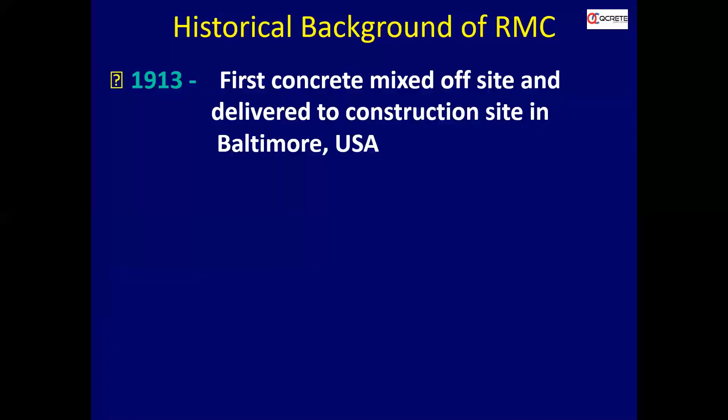Okay, so a brief historical background of RMC. 1913, the first concrete mixed off-site and delivered to a construction site in Baltimore, USA. And as I told you, 1903 was the first, the concrete plant was patented in Germany. And in 1926, transit mixer was first used. 1930, the first RMC plant established in UK. And 1933, the first specification of RMC published in USA.

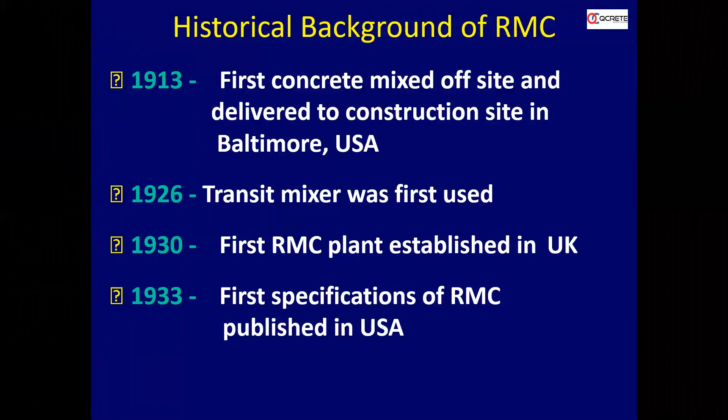Now, the historic background of RMC: from 1960 to 1980, there was a phenomenal growth of RMC in USA. Around 31 million cubic meters were built by 1974, and by 1990, 75% of cement consumption was manufactured through ready-mix concrete plants. Now we can say around 90% of concrete produced is from ready-mix plants.

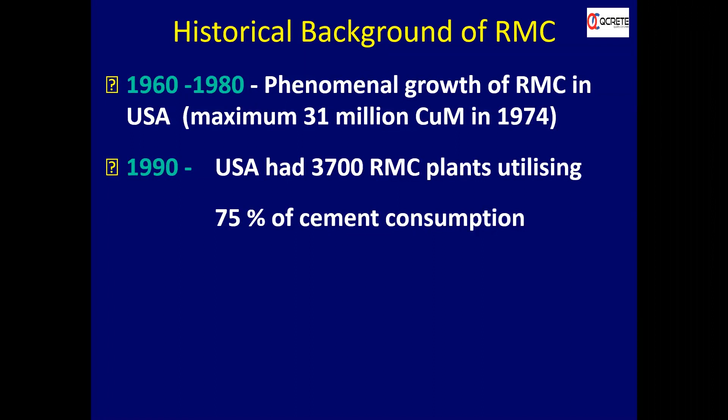So compared to that, now if we see RMC in India: 1991, the first commercial RMC plant was set up in Pune, but closed later on. That was not viable because a lot of taxes were being imposed on ready-mix concrete plants or concrete coming out of the plant, so it was not viable for commercial operations. It was closed later on, and then in 1994 it started again.

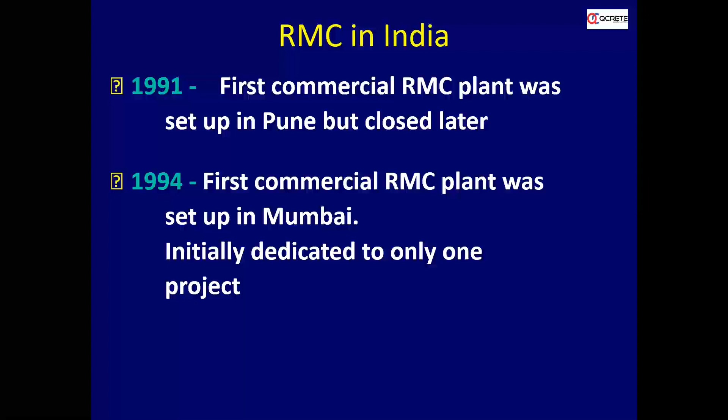It started as a dedicated plant, and then they started using it as a commercial plant. So in 1994 we started our commercial operations in Mumbai. That is the start of RMC in India. Now you can see a ready-mix concrete plant as of today.

2020, or you can say now 2021 also, it's in infant stage. Market penetration is around 15%. So we are still in the toddling stage actually. We require a lot of ready-mix operators, a lot of support from the construction industry to reach the stage of developed countries like USA, UK, and other developed countries.

Now, this is basically a ready-mix concrete plant. You can see it comes in different capacities depending on the requirement. Mostly for smaller setups, it starts with 30 cubic meter batching per hour. It goes up to 60, then we have 120, then we have 180 cubic meter.

So depending on the requirement, suppose a huge project is there, then they go for a dedicated plant where they can use 30 cubic meter, 60 cubic meter, 120 cubic meter, 180 cubic meter capacity also, they are using it.

So all the cements are being stored in silos, and we have transit mixers taking the concrete, plying the cities, carrying the concrete. So working in the ready-mix industry, it's a live industry.

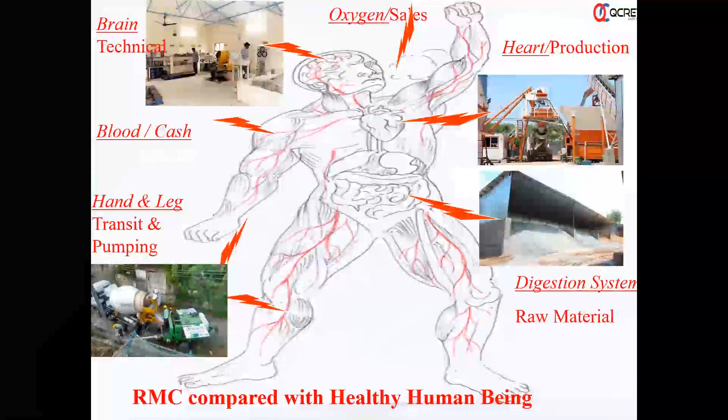So just as I told you, the first part - the sales and the cash flow - I'm not going to discuss, it's a technical support system. For any ready mix concrete, we have to have a good laboratory at the plant.

It is also essential that all the consumers should visit the ready mix plant and see for themselves what sort of facilities a ready mix operator has, and what quality systems they are following, or whether they have immediate access to well-equipped laboratories fully equipped to carry out tests on concrete, cement, aggregates, and sand. All tests are to be carried out as per the relevant IS codes.

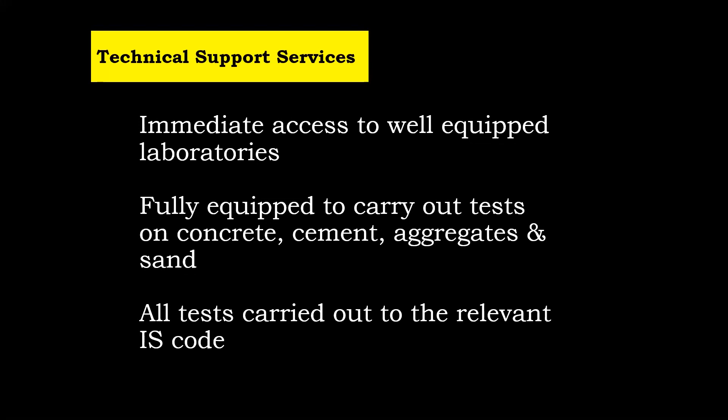So this is a view of a laboratory. Every person who orders concrete, even if it is an individual house builder, can visit the plant and see for himself what all facilities and things they are doing at the lab to produce good concrete.

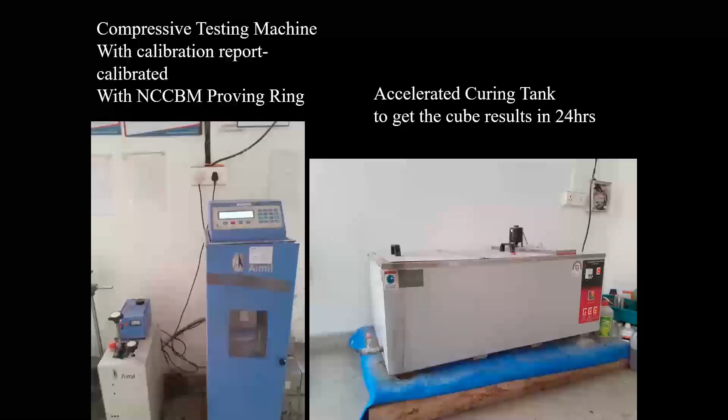Now you can see we have equipment like a compressive testing machine. Most engineers fail to ask when this machine was calibrated, or where the calibration report is. The operator has to display the calibration report near the machine itself, so that the customer who comes to check the cube strength can see when it has been calibrated. It is calibrated through NCCBM, which gives us a certificate that has to be pasted along with it. Also, some customers say they want to test it themselves.

We take it to some lab where it has to be tested. But there also they should ask the same question: when was your machine last calibrated? Because all machines have to be calibrated, and only then do you get the correct report.

We have this accelerated curing tank to get cube results in 24 hours. Basically, somebody wants to do the concrete and cannot wait for 28 days. We cast the cubes and get the results in 24 hours, so we can go ahead with the concrete pour without waiting to see whether the mix design done is correct or not.

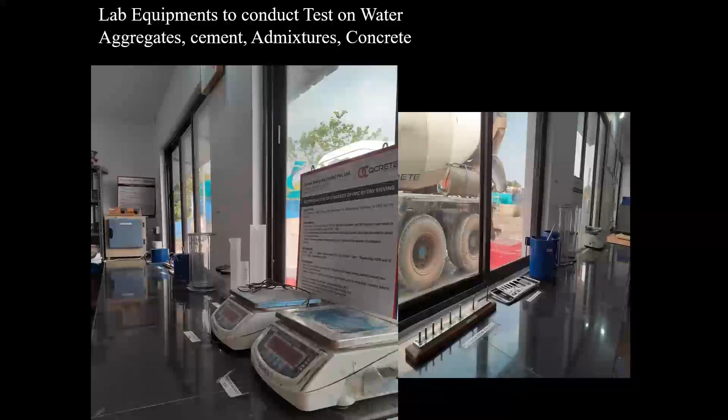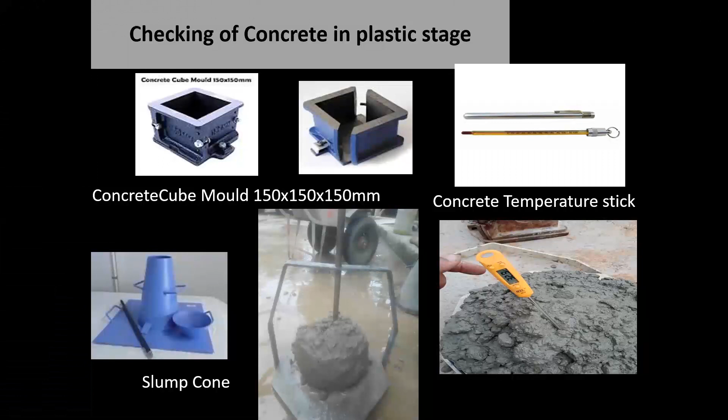Now I'll clear a few doubts. For sampling in a ready-mix industry, we take the sample for making slump as well as for cubes. There's a slight difference when we are doing site concrete versus ready-mix concrete. When a truck comes with 6 cubic meters of concrete, the sampling method, as per BS or IS second revision, says that the first 0.3 cubic meter you have to let go into the pump, and then the balance you have to take in.

This is a scoop which is being used, and the concrete flow is like this. You have to take the scoop across the flow actually, and it is taken in one part, then let concrete go, then second part, then third part, and fourth part, and then it has to be taken into a pan, remixed, and then taken in. So that way sampling has to be done.

If you take it from the beginning, you may get segregated concrete because it's a huge sample, 6 cubic meters, and from that sample you have to take one sample of 3 cubes. Sometimes the customer says, no, take 1 cube from every truck. That's not the right method, because you may not get the right strength. If one sample means you have to take at least 3 cubes from one transit mixer.

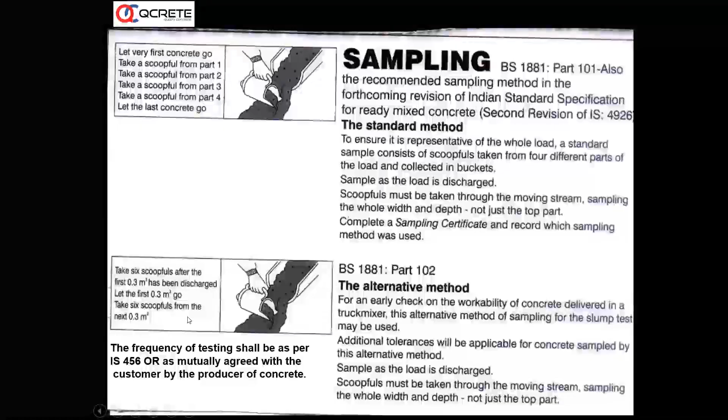This is an alternative method. Some discharge has to be taken - the discharge takes 6 scoopfuls after 0.3 cubic meter discharge. Let the first 0.3 cubic meter go, then take 6 scoopfuls from the next 0.3 cubic meters. Now you can see here how this particular person is taking it through this scoop, and the concrete is flowing in this direction. Through the scoop, he is taking the sample across the flow of the concrete.

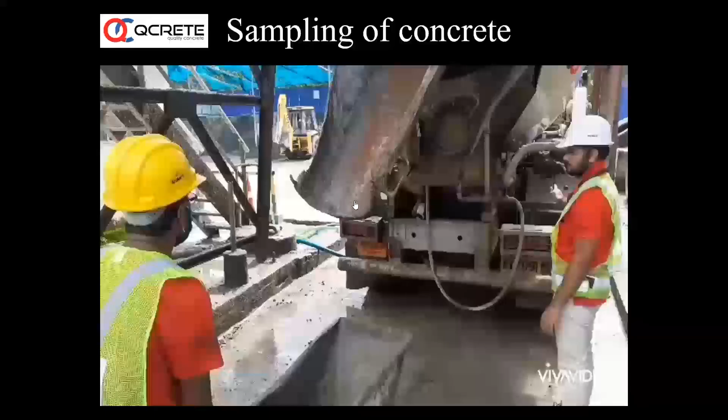Now you can just see a small video. The sample is being taken at the plant. Now you can check the temperature of the concrete through the temperature gauge. Now the sample is being remixed.

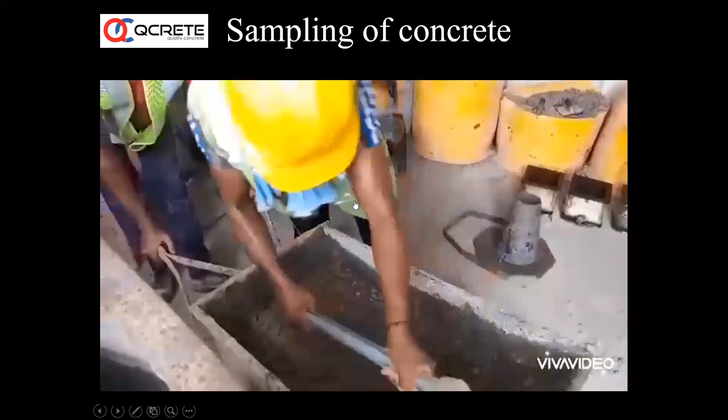This remixing is very, very important. It has to be remixed. The sample has to be remixed before we take the slump or the concrete cube section, because from the truck, there's a chance that the first concrete which is coming is segregated. This is a scoop which they are using to take it to form the slump.

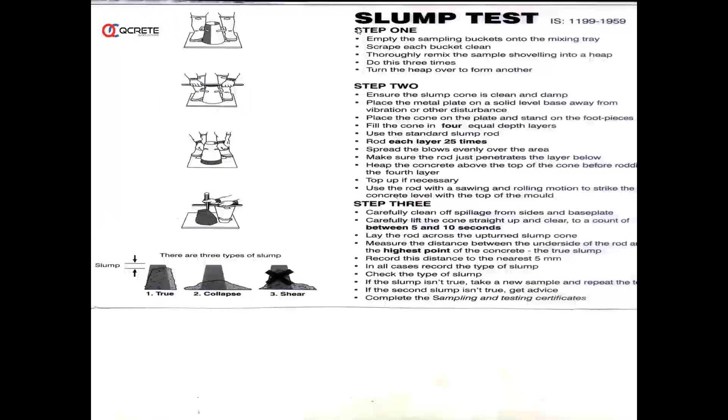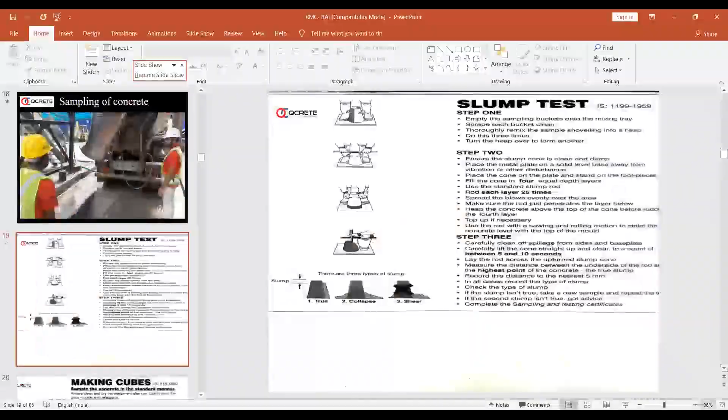Okay, I'm skipping the video. I was just showing how to take the sample through a video.

Are you able to hear it? Hello? Yes, yes, I'm able to hear you. Am I audible? Yes, yes, perfect.

So I was just showing the video of how to sample concrete at the plant and how it has to be remixed, and then how the slump test is being done at the plant, and then how cubes are filled, the correct way of filling the cubes. Anyway, the video is not visible, so I'll show it after the session is over.

I'll drop this PPT and then show that video actually.

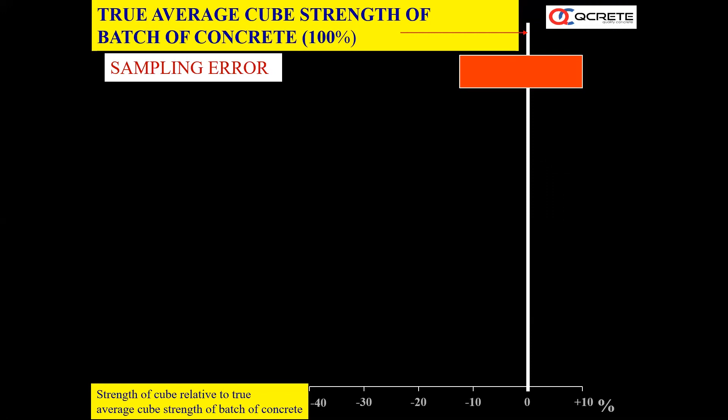So for a particular batch of concrete, when you are taking slump and concrete cubes, due to sampling error, there is a chance that your cube may not achieve the strength. It may show overstrength by 10% or minus 10%. If correct sampling is not done, the cube strength can vary from minus 10% to plus 10%, or failure to remix the sample properly. As I told you, when you take the concrete sample, it has to be remixed properly. If this is not done, there is a chance that around 15% failure of concrete can take place.

Then we have distorted cube molds and lack of cube mold oil. If this is not done properly, there is a chance that you may not achieve the cube strength by minus 20%, or you may achieve it more by around 5%.

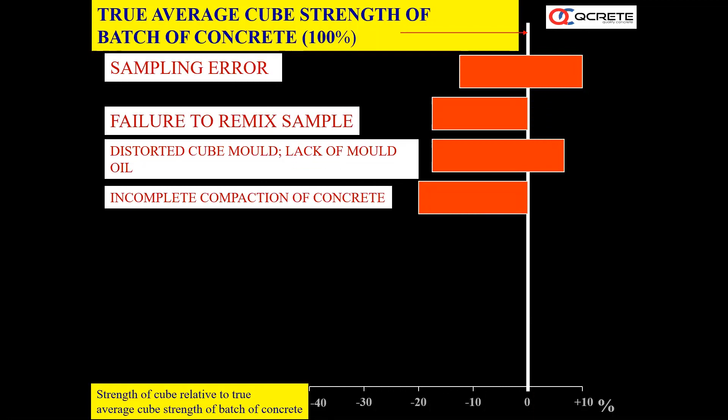Incomplete compaction of concrete can lead to 20% less strength, or curing temperature outside the permitted range as shown in code can lead to plus or minus 10%. If it is very hot summer, it may show higher strength. If it is during cold, foggy nights, it can show minus strength results.

Lack of continuous moist curing can lead to minus 35% less strength. Faulty cube locations in the machine or other operator faults can lead to minus 20% or plus 5%. And faulty test machines, if present, can lead to minus 25% to plus 10%. So these are the variations.

Most of the time, when a cube fails, people directly say that the concrete is not good, and due to this the concrete has failed. Directly the blame is put on the ready mix producer. But it's not like that. As an engineer, we have to analyze all these parameters to understand why the cube has actually failed.

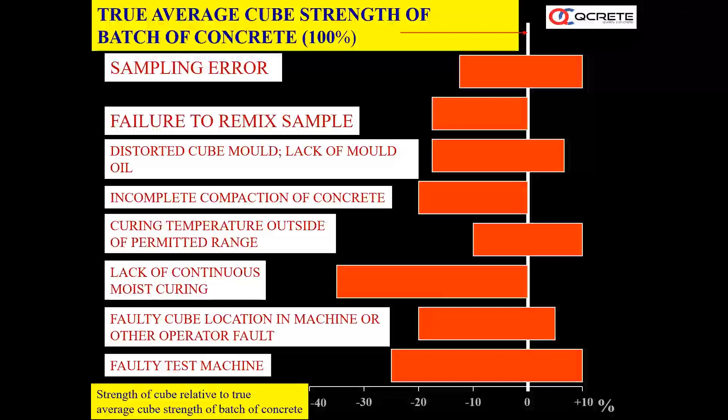Now in ready mix plants, it is not labor oriented anymore. Earlier we used to get cement in bags even in ready mix plants. When we started our operation in Kerala, around 2007 or 2008, we used to get bags, and it was a manual operation, cutting the bag and putting it into a loader. Now that time has gone, we get bulkers which come in airtight containers, reach the plant, and are directly unloaded into the silos.

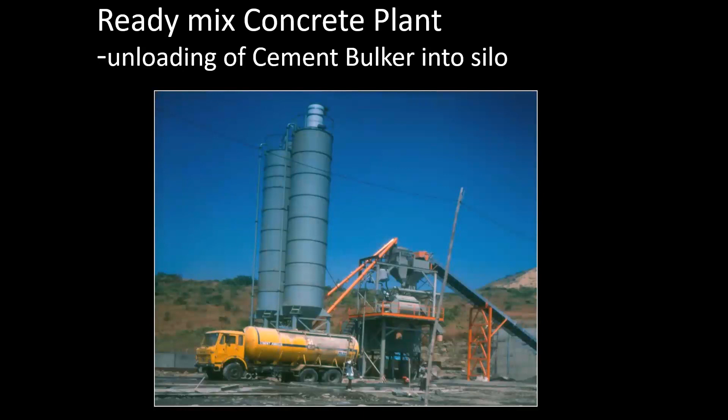Now in ready mix, all the raw materials are received through weight. We have a weighbridge there. Once the truck comes, the quality person goes to the top of it, collects samples, and it is tested in the laboratory for initial testing, to check whether the aggregate supplier or crusher has supplied the same quality material or if there is a variation. Some quick tests are done to pass that material into the yard.

Now if you visit ready mix plants, you can see all the materials are stored in separate bins. There is a hard base where no mixing of material with mud takes place. A concrete hard base is kept so that the materials are kept clean and differentiated, like 20mm, 12mm sand, M sand, and everything else.

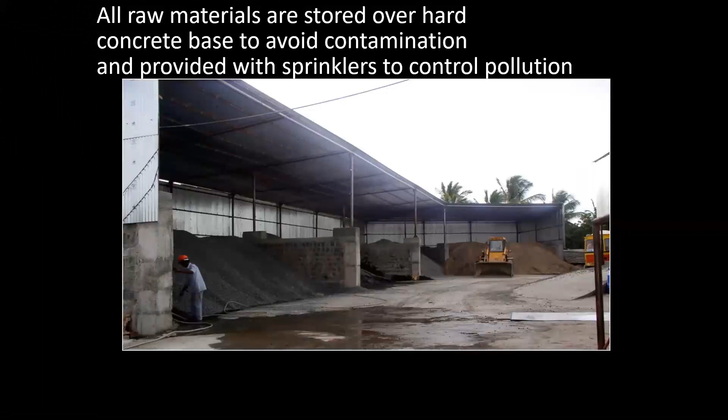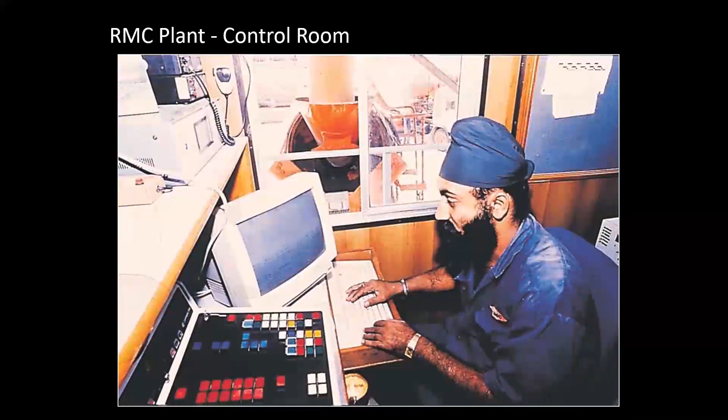Now this is microprocessor controlled. This person is just taking instructions from the technical department. The technical department designs the entire mixes and passes them on, and it is stored into this computer's memory. Depending on that, it can be repeated also, because the customer name, the batch reports, and the mix designs are all stored. So you just have to click the buttons and the mixing starts, and the concrete production begins.

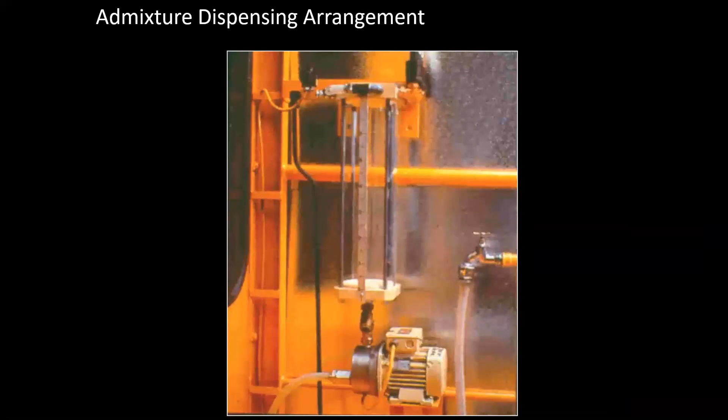Now it is all an electromechanical weighing system. All raw materials which come into the plant are weighed, and all material that goes into mixing, whether 1 cubic meter, 2 cubic meters, or half a cubic meter, everything is weighed. All raw materials - aggregate, cement, water, and admixture - are measured by weight only. It goes into the mixing unit of the plant. These are called admixture dispensing units. Most ready mix plants will have 2 admixture dispensing units.

One dispensing unit is kept for normal concrete, and another is kept for specialized concrete, which might be high strength concrete or might be to produce SCC. So 2 dispensing units will be there in a ready mix plant.

So this one explains why we should use ready mix concrete. I'll come to that next part. Earlier I gave a brief about what quality aspects are being checked at the ready mix plant.

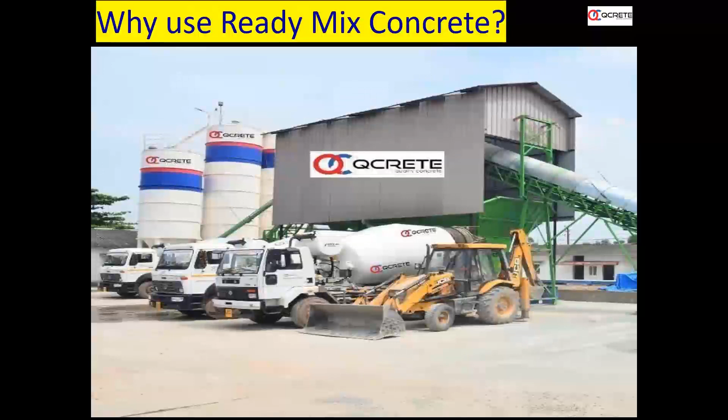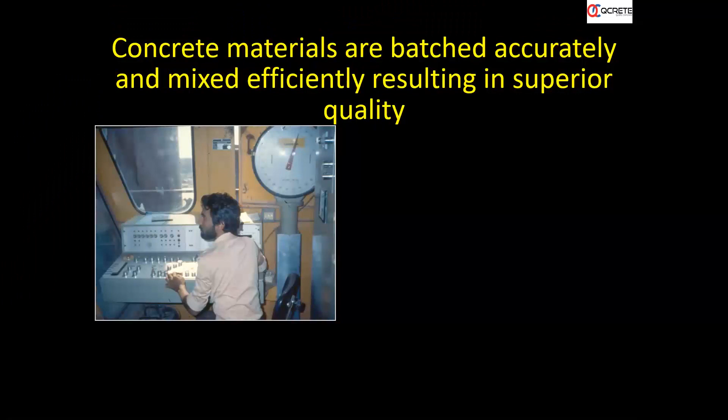Now, why use ready mix concrete? If you compare it with site mix, concrete materials are batched accurately and mixed efficiently, resulting in superior quality. Compared with site mix, we have the drum mixer where the efficiency of mixing is very poor. Now you can see pan mixers, with arms rotating at very high speed, and due to which we get superior quality concrete mix. Also, since it is batched by weight, it results in faster speed of production.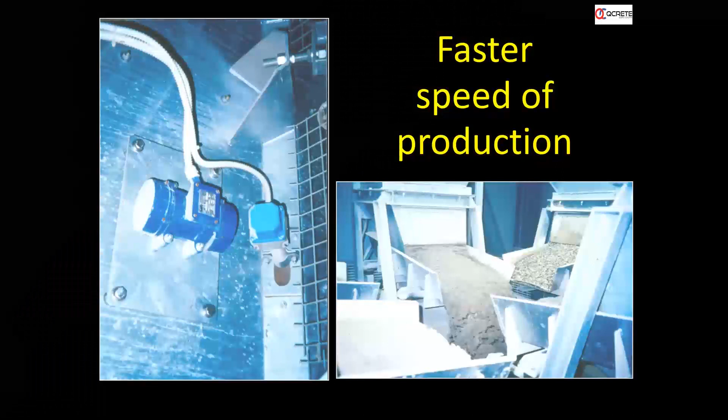Then, moisture corrections can be done accurately, hence water cement ratio can be accurately controlled. In some systems, as the aggregate flows into the batching system, whatever moisture is there in that aggregate gets measured, and that much water gets reduced from the total water to be added to the concrete mix, so your water cement ratio is accurately controlled.

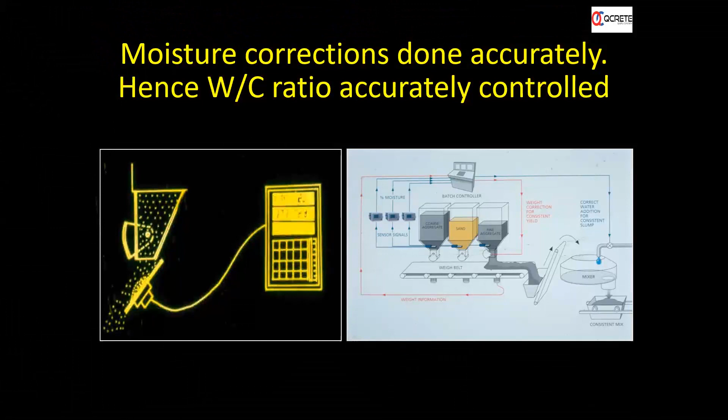At construction sites, housekeeping improves because you don't have to worry about storing aggregate, cement, and all these things. You only have to worry about scaffolding and how to place the concrete, where the equipment should be placed to deliver it. Other than that, all other space can be used for storing shuttering, steel, etc. at site.

Now, labor requirements can be reduced considerably. When using ready mix with pump concrete, we have 4 to 5 people standing on the slab handling the line pump. But if it is a boom pump, we have only 2 persons standing on the slab, so there is minimum manpower required. A lot of labor requirement can be reduced, actually.

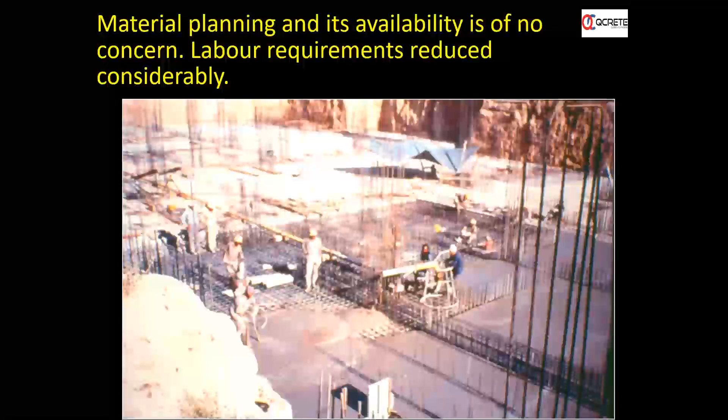Also, chemical admixtures are accurately and properly dispersed in the concrete mix. Chemical and mineral admixtures can be used easily. If you are using site mix concrete, you may not be able to use mineral admixtures like fly ash, GGBS, or microsilica for producing high strength concrete—these are all very difficult to use in site mix concrete. Even chemicals are difficult to use at site mix to an extent. So these can all be used when we are using ready mix concrete.

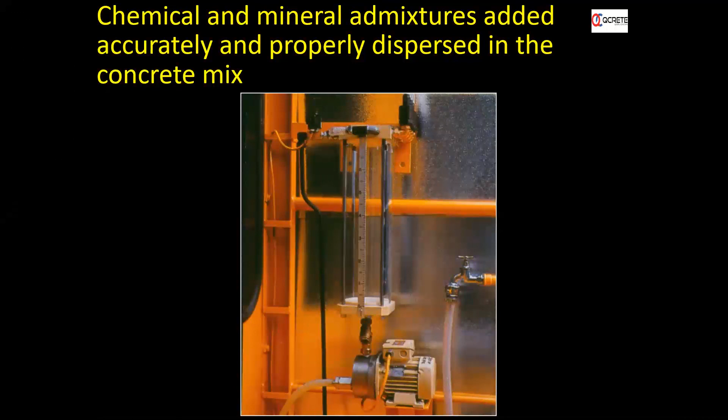It creates less environmental pollution at the site. For site mix, if you dump all the aggregate and cement, pollution happens at the site. Whereas in a ready mix plant, it is already located in an industrial zone where a certain level of pollution is allowed. So all the pollution happens at the industrial area, whereas at the site it is clean, because only the mixed concrete reaches the site, so it doesn't create any pollution at the site.

It also creates less nuisance on site, as stacking of materials is avoided. There is no stacking of materials, so it is much less nuisance at site.

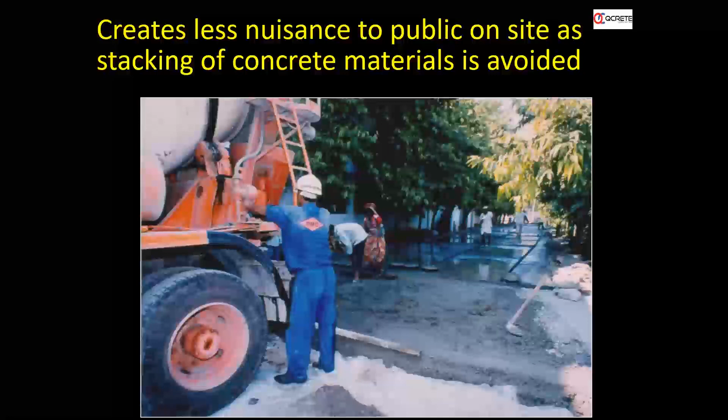It helps for pump concrete, bulk transportation, self-compacting concrete, faster concrete—all these things help. When we started our ready mix operation in Cochin city, most people were using bamboo and balli for the supporting scaffolding system. Now if you go around Cochin city, you can see a considerable improvement in formwork. It automatically improves with time, because if they wanted to receive ready-mix concrete, they couldn't continue with their old practices of bamboo and balli. So scaffolding automatically improves by the use of ready-mix.

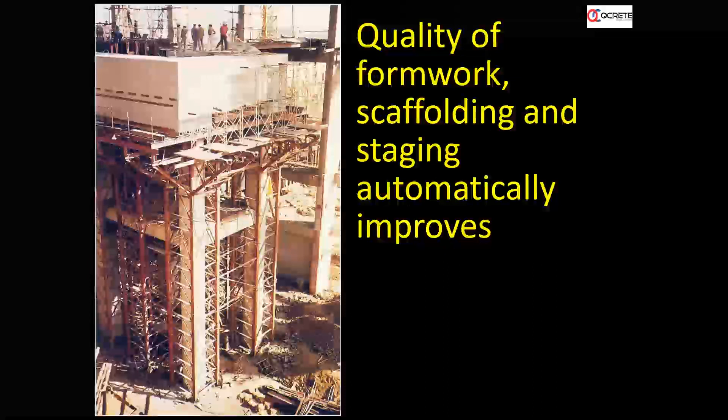Another important property is that for the pump being used in concrete pumping, the concrete should be workable and cohesive—that's essential for the pump to work. This is good for both the concrete and the site person, because the pump requires workable and cohesive concrete. So the mix design improves to suit the pumpable requirement, and ready-mix operators are forced to give a good, workable and pumpable concrete, which automatically improves the finish and durability of the concrete structures.

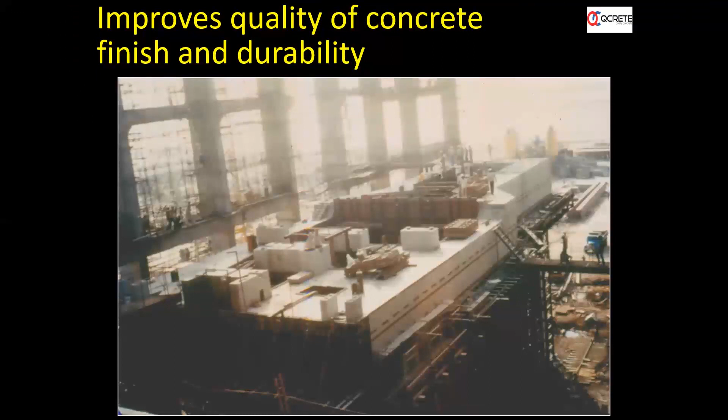Now again, why use RMC actually? Wastage of concrete materials can be avoided. At site mix concrete, a lot of materials are procured by the contractors, and at the end of the concrete day, you can see concrete materials lying wasted at the site. Temperature control of concrete, as I told you earlier, is easier in both hot and cold weather conditions. It also facilitates new materials like fibers, microsilica, etc.

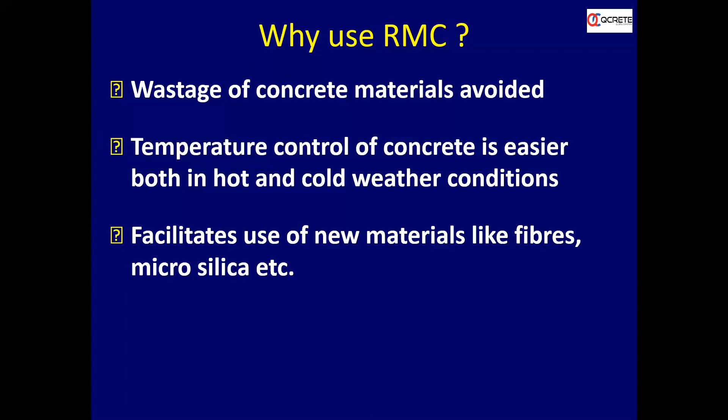Most of the time what happens is that we simply order the concrete. Most of the time, what I have seen is that engineers will say, okay, I want M25 concrete or I want M20 concrete. Nothing more than that they will specify.

The most important thing is the type of structure which you are handling at site. If it is normal reinforcement, you can go in for normal workability. If heavy reinforcement is there, your workability requirement increases. So these are all requirements which the engineer should pass on to the ready-mix operator.

Because if you just ask for a concrete, then what happens is they will give you 100 mm slump at site, plus minus 25, as per the requirement of IS code. It is allowed, that is 75 to 125, and you cannot reject the concrete.

So if it comes at 75, you are required to take the concrete, but when it reaches the slab, the workers struggle to put the concrete in place, and then competition starts if the steel reinforcement is congested. So as site engineers, you should look into the site requirement.

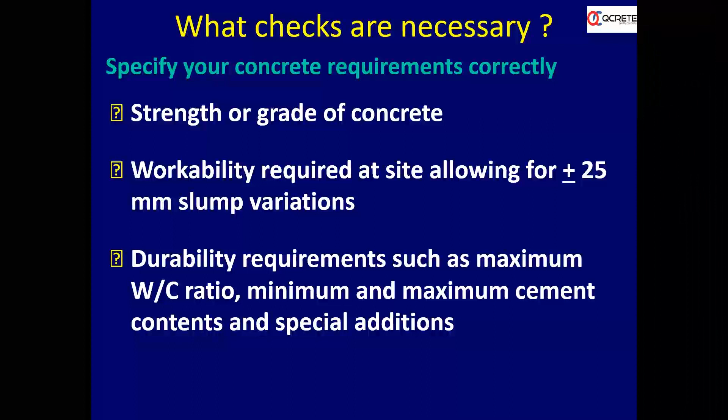Then durability requirement, like what is the maximum water-cement ratio, minimum and maximum cement content, special additions - all these things must be very correctly specified. These are the things which have to be done by the site engineers.

Then again, what is happening is the rate of gain of strength to suit the formwork removal. Some people will take the concrete - it may be required for column concrete which has to be removed the next day, which is not told to the ready-mix operator. He supplies you the concrete, and then next day when you remove it, the entire thing might be collapsing.

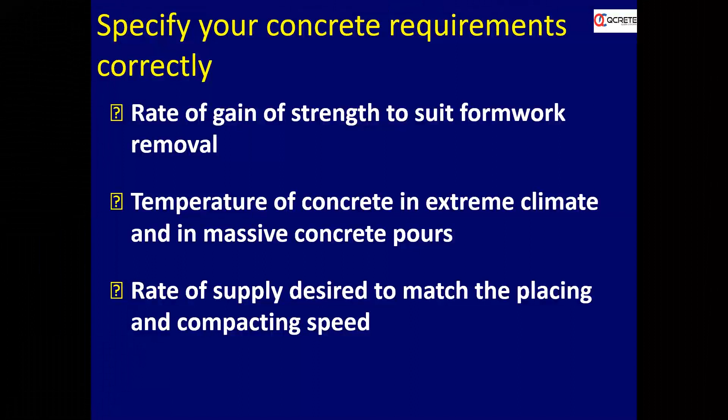So what is the strength requirement? What is the temperature required for concrete in extreme climate? Rate of supply desired to match the placing and compacting speed - all these parameters have to be looked into by the site engineers, like type of finish desired, lift and lead of concrete transportation and placing at site.

Now, prior to giving order to a ready-mix plant, they can visit the plant and check for all the calibrations. It is not only that the cube testing machine is to be calibrated - all the equipment being used in the ready-mix plant has to be calibrated. You can ask for the calibration report. The weighbridge has to be calibrated, and the plant itself has to be calibrated.

There is a frequency mentioned in IS code for when it has to be calibrated, what is the range of calibration, what is the plus minus range given. What is the frequency it has to be calibrated, whether the operator is doing it, when it was last calibrated - all these reports can be asked of the ready-mix operator prior to giving the order.

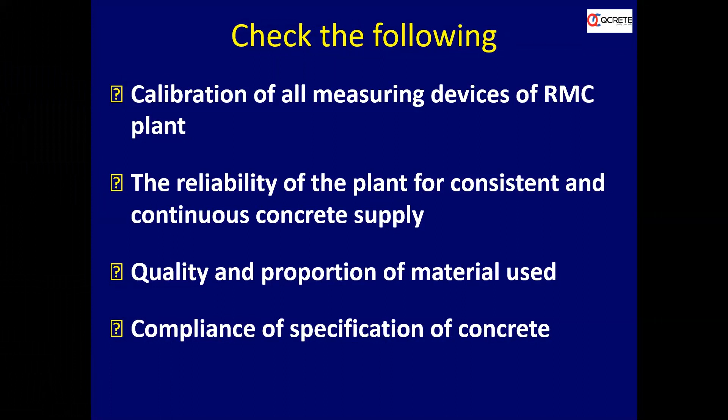Then reliability of the plant for consistent and continuous supply can be checked, quality and proportion of material used, and compliance with specifications of concrete. So all these checks can be done at the ready-mix plant prior to receipt of the concrete.

What are the checks needed prior to receipt of RMC at site? Earlier, for giving the order to a ready-mix operator, you can visit the plant and check all the parameters. Now I am giving you what checks you require to do at site for giving the order - that is reinforcement and layout at site. If it is congested reinforcement, you cannot ask for normal concrete, you should ask for special concrete.

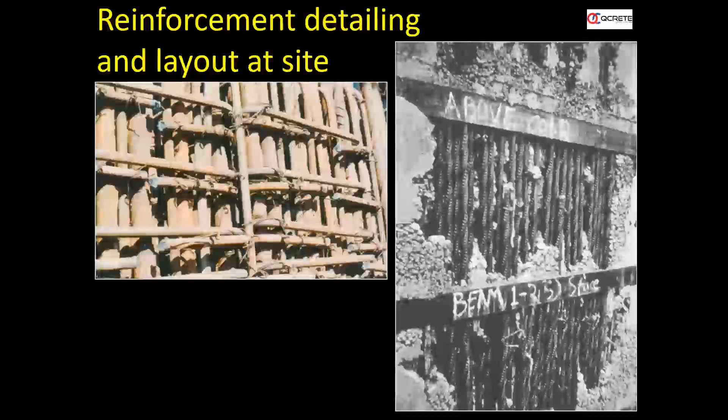Otherwise, you will end up with honeycomb. Nowadays what happens is people will directly blame the ready-mix operator, saying he has not supplied the correct concrete. I am asking whether you had correctly specified what concrete you required at site actually.

Then the speed of supply and the lift of placing can be checked. What sort of requirement you need - if you say you require 50 cubic meters of concrete, the ready-mix operator may send all his 8 trucks with 6 cubic meters each at a time. But at site you may be casting a column, and all those trucks will be standing there, making it very difficult to unload. You may require a lot of time.

So depending on the requirement, it has to be specified - okay, I want 50 cubic meters, but first send 6 cubic meters, and I will let you know when to send the next one. So there will be a gap. This has to be planned and told in advance to the ready-mix operator, because he may not only be looking at your supply - it's a commercial operation. He may take 1, 2, or 3 jobs, and accordingly he has to plan his trucks to execute your orders.

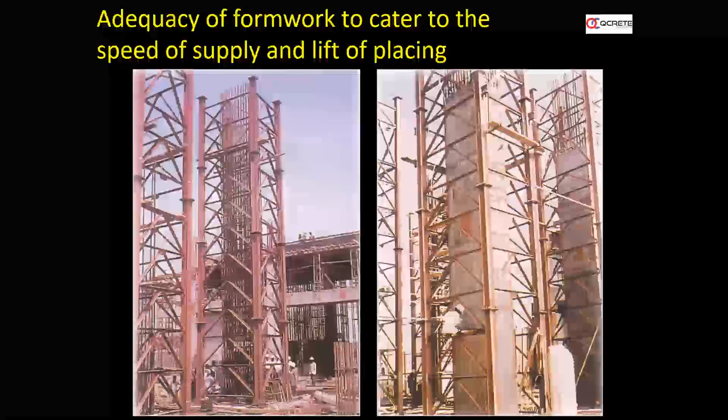Then adequacy of staging and pathways for worker safety - that is the site's responsibility, to see whether your staging and form work are in proper condition before receiving, because it is not like doing site-mixed concrete. Here the rate is different. Is it sufficient? Whether we have sufficient equipment.

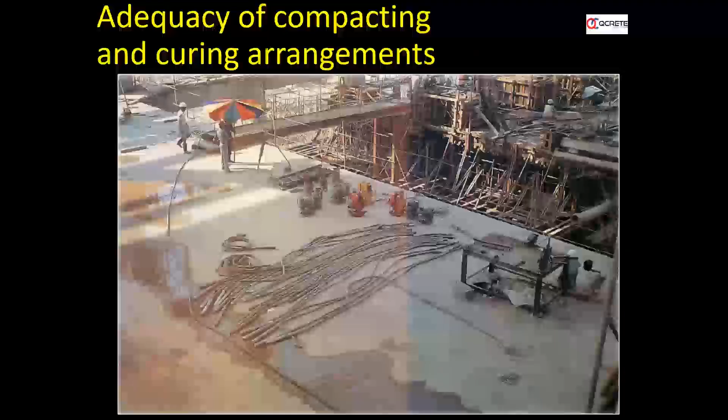Another basic issue I could see is that you order ready-mix concrete and then you don't have sufficient vibrating equipment - poker vibrators are not there. You may be stuck with one or two, and once that gets conked off, the trucks will be standing there. As time passes, after 3.5 or 4 hours, it has to be rejected. So you should ensure sufficient vibrators are arranged prior to the concrete pouring arrangement.

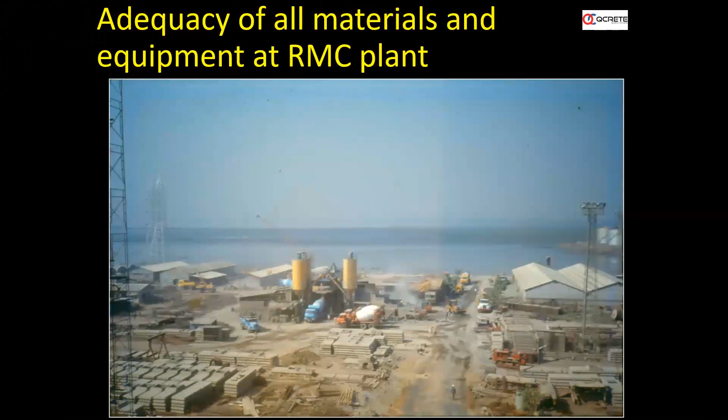Water checks are required at site during the concreting. Then you can check whether all the equipment is in proper condition, and whether additional equipment is there for the ready-mix operators. Workability and temperature control can be checked at the plant and at the site - workability can be checked before receiving the concrete.

Then we have standby equipment - whether standby equipment must be kept working throughout the concrete pour. Sometimes what happens is we keep standby equipment, but when a breakdown happens and you try to start it, it may not work. So you should ensure it is in working condition before starting the concrete operation.

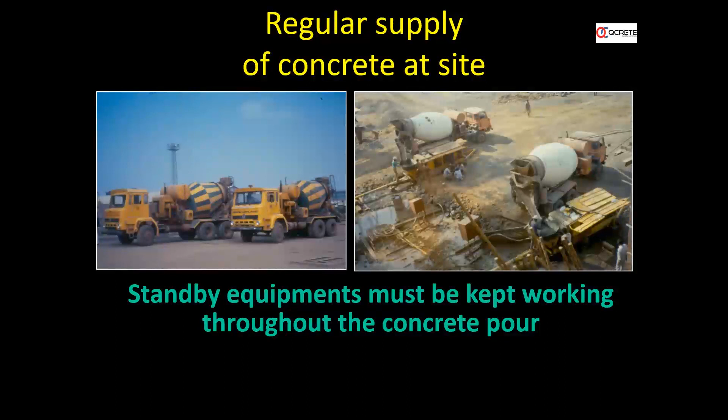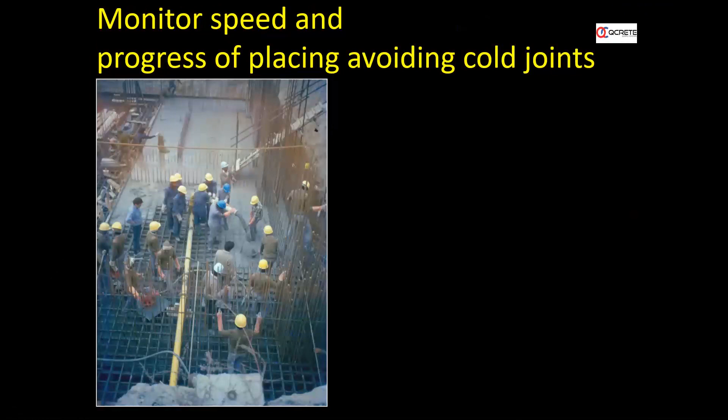Then monitoring the speed of concrete to avoid progress issues in placing, avoiding cold joints. Then again, segregation.

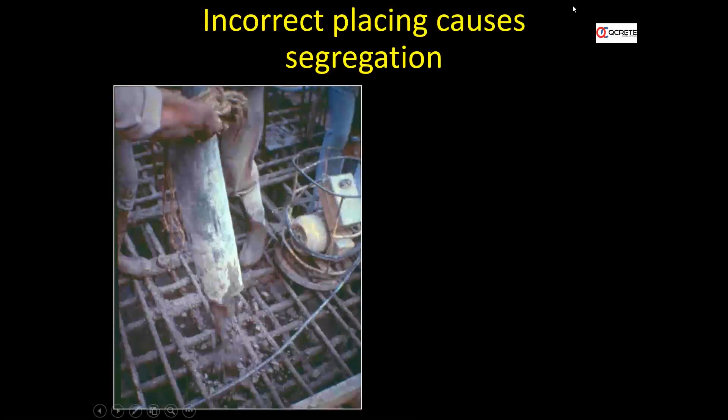Segregation is another issue - proper placing of concrete is very much required. That is for the engineer at site to plan. Even though your concrete is very good, cohesive, and pumpable, if you are placing it in the wrong fashion, you are segregating your concrete. You can see only the aggregates flowing down, while all the finer materials get stuck onto the steel reinforcement. If you are doing this, you are again segregating the concrete and not doing justice to it. More segregation happens, and in the end you will see it is not epoxy-coated reinforcement, it is mortar-coated reinforcement. After the concreting is over, we then ask a mason to remove all the fines and put it back onto the concrete. So it's all incorrect placing which causes honeycombs.

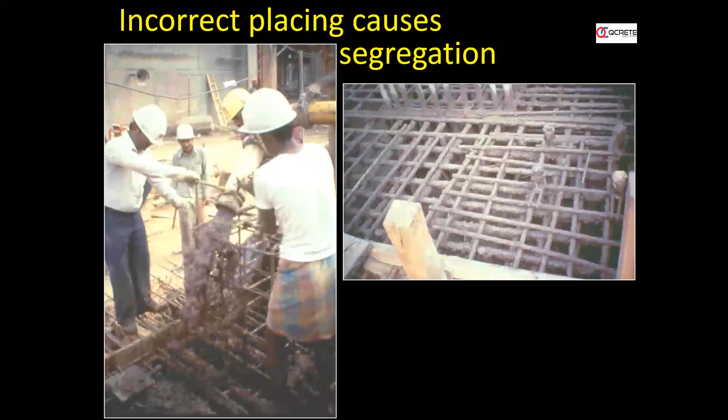Now, correct placing can be planned - for example, for deep foundations, you can put tremie pipes and take the concrete through the pipes at different locations, and the concrete will flow down instead of hitting the steel reinforcement, as shown in the photograph. So planning the placing of concrete is a very important requirement at site.

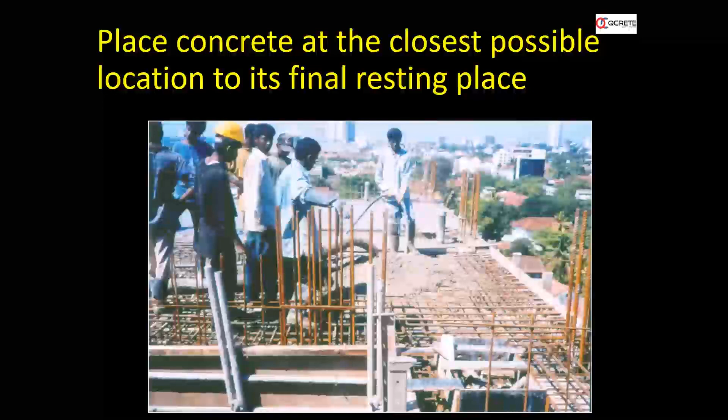Now again, compaction. Now the placing, you can see another important aspect when we are doing ready-mix concrete compared with site mix concrete.

Curing, most of the time we are in the habit of doing the curing the next day. But ready-mix concrete doesn't work like that, because the top portion, especially as we go higher or during hot summer, uses a cohesive concrete. The rate of flow of water is very less, bleeding is very less, due to which the top surface gets dried up faster, and there will be a curling action due to which shrinkage takes place.

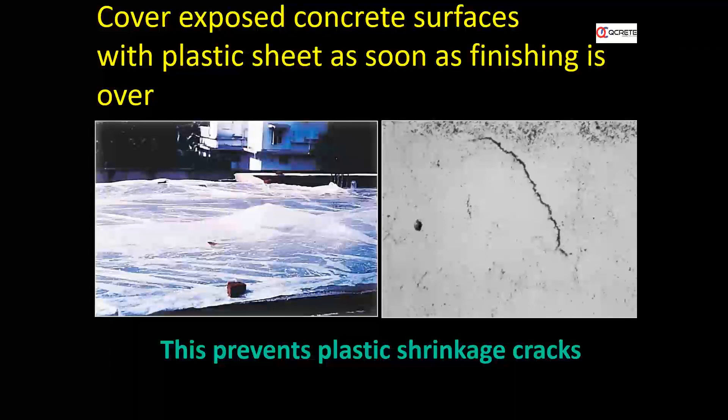This is a difference when we are doing manual concrete. You can see a mason here, the rate of loading concrete is very slow, so the mason keeps on floating. So even if some cracks happen in site mix cohesive concrete, it gets disturbed and the crack doesn't happen.

Whereas in ready mix concrete, the rate of concreting is very fast with cohesive concrete. The mason finishes the job faster, thinks the job is over, and moves on. Next day he comes back, and we see a lot of shrinkage cracks happen because the job was not actually over.

Once that is over, he has to see that it gets covered with a plastic sheet, or he should go for retamping work. If any cracks happen, it has to be disturbed and retamping has to be done again, covered in plastic sheet, and early curing should be started.

Suppose morning 6 o'clock your work has started, by 10 or 11 o'clock your work gets finished. You should see that the first part of the concrete starts curing by 12 o'clock. When there is no thumb impression coming onto the concrete surface, you should start curing it. The best thing is to cover it with plastic sheets.

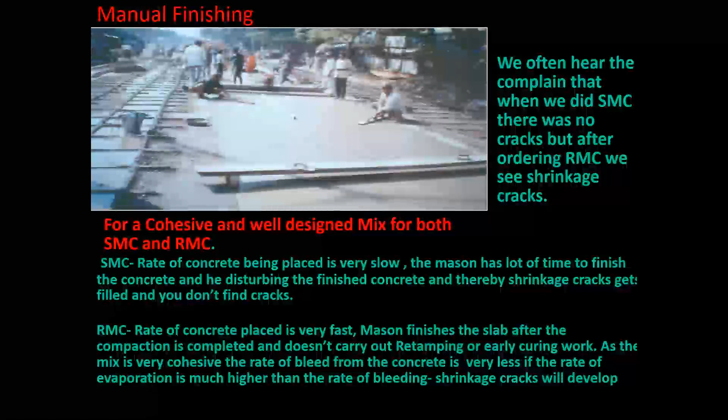This is basically if the concrete is cohesive. If you are making a site mix concrete that is cohesive, or a ready mix concrete that is cohesive, these shrinkage cracks will appear.

Whereas in site mix concrete, if it is not cohesive, most of the time single size aggregates are being used. You can see a lot of bleeding comes, the mix is not cohesive, and water comes onto the top.

Then some people will compare and say that when doing site mix concrete there were no cracks happening, but when doing ready mix concrete a lot of cracks happen. It is not that the ready mix operator is supplying the concrete with cracks. It is basically a site-oriented job. The site engineer should look into it so no cracks happen, and all these precautions should be taken.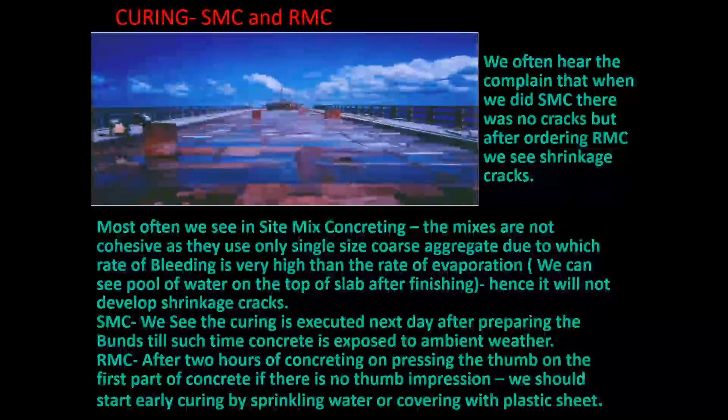Now this is the plastic shrinkage cracks problem, which we are facing in and out when placing this concrete for IHB segments or in some sites. These are the complaints which come, which we regularly attend.

It happens within 30 to 360 minutes. As I told, rapid early drying conditions, hot sun, low humidity, high wind—these are some of the reasons.

The preventive measure is you have to cover it with a plastic sheet or start early curing. You cannot wait for the next day to start curing.

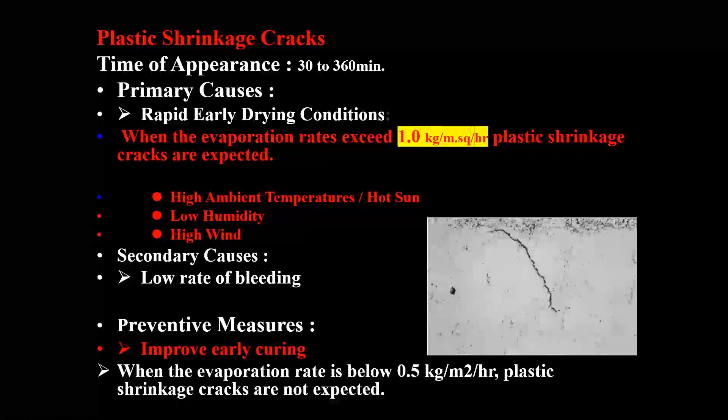This is a video which I'll not be able to show you.

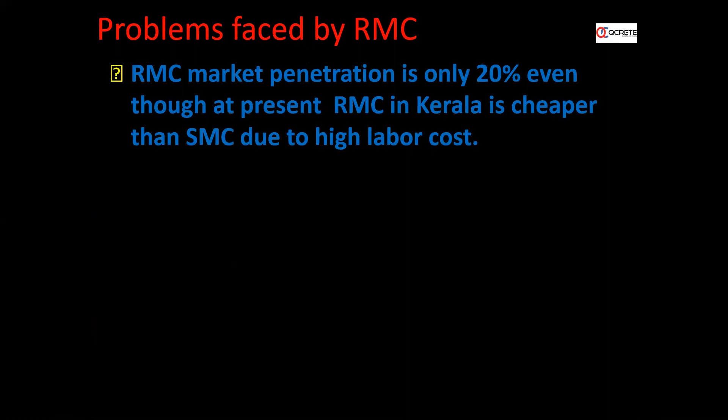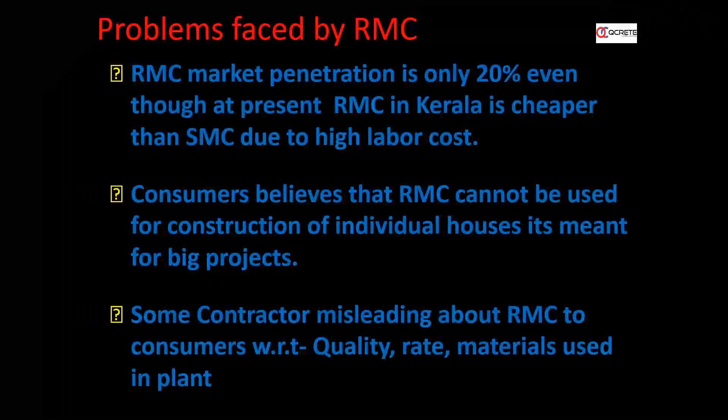Now, problems faced by RMC operators. RMC market penetration is only 20%, even though at present RMC in Kerala is cheaper than site mix concrete due to high labor cost. Consumers believe that RMC cannot be used for construction of an individual house, that it's meant only for big projects. Then some contractors mislead consumers about RMC with respect to quality, rate, and materials used in the plant. These are some of the problems faced by the RMCs.

Then consumer owners are unaware, when giving their work as a labor contract, that the total cost incurred is more than when adding material cost and labor cost, compared to the RMC supplied and pumped at site. What happens is that contractors take labor contracts from owners while the owners supply the material. If both are added, the cost of site mix concrete is much higher than ready mix concrete in today's condition.

Then there are delayed payments from clients, high capital cost for plant and equipment, and RMC plants are only permitted in industrial areas, industrial zones.

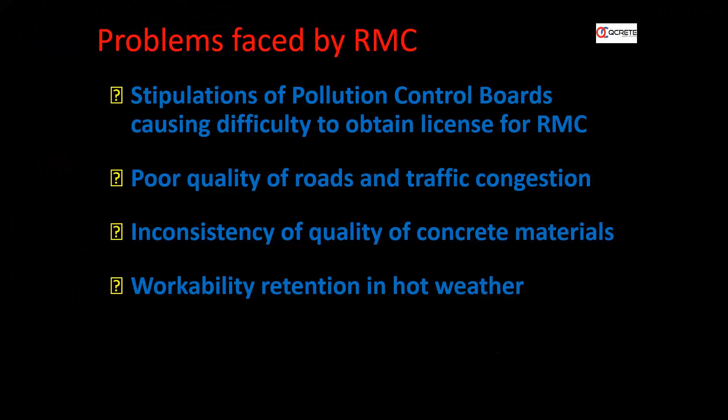Problems faced by RMC include stipulations of pollution control boards causing difficulty to obtain license for RMC, poor quality of roads and traffic congestion, inconsistency of quality of concrete materials, and workability retention in hot weather.

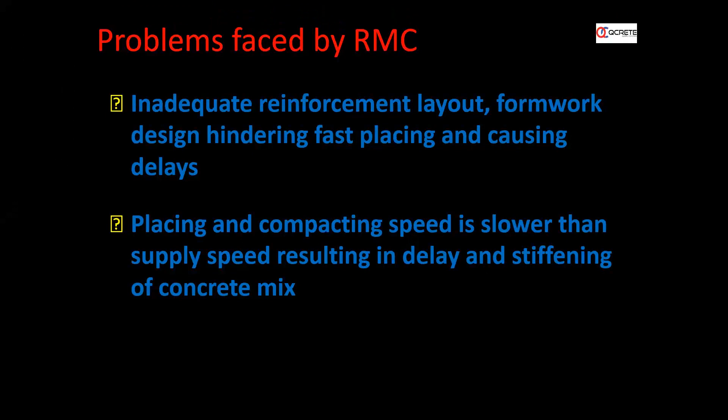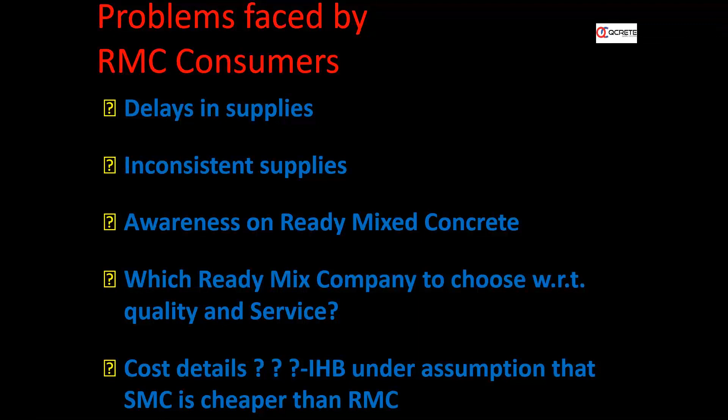So these are the RMC consumer problems. Now comparing site mix versus ready mix, which I've already explained: quality is more consistent in ready mix, whereas site mix is inconsistent. There's also time saving, raw materials, wastage, labor saving, safety, and procurement of materials - all these parameters I've already covered in my slides. I also made a cost comparison between site mix concrete and ready mix concrete.

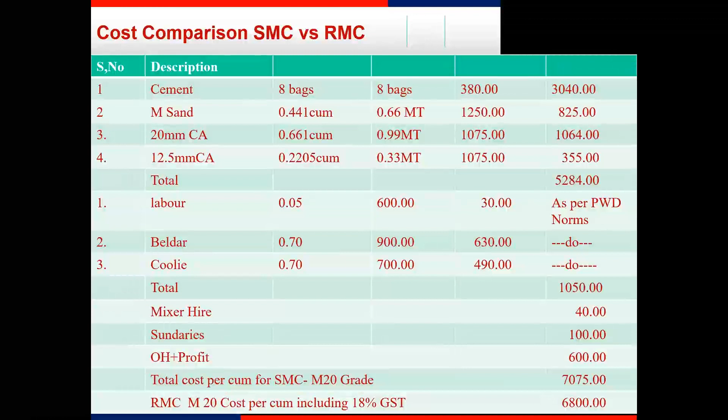You can see for a site mix concrete, for M20 concrete, it goes up to 7,075 rupees even without GST. Whereas we have a lot of ready mix players supplying M20 concrete at 6,800 rupees per cubic meter, including GST. So that much cost difference is there between SMC and ready mix concrete.

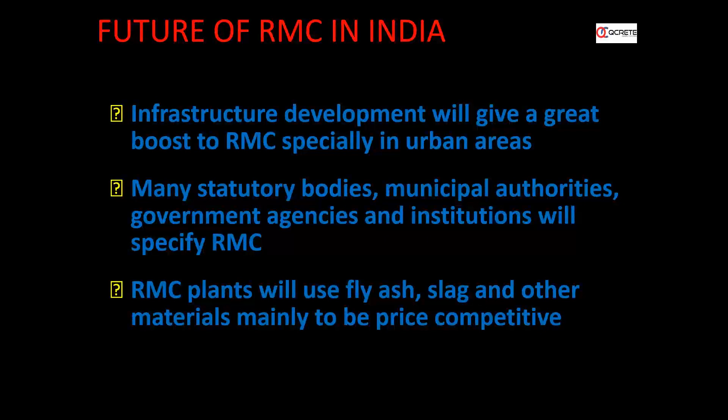The future of RMC: infrastructure development will give a great boost to RMC, especially in urban areas. Many statutory bodies, municipality authorities, government agencies and institutions will start specifying RMC - it has already started. Most people have turned towards RMCs, and I hope the penetration level will increase in coming days. Kerala will be the first state to have ready mix plants throughout, every 25 or 50 kilometers, right from Trivandrum to Kasaragod. RMC plants will use fly ash, slag and other materials mainly to be price competitive.

I hope that by 2030, RMC in India will be running up and down happily. This industry needs all engineers to support it - first they should learn how to take and specify concrete, and it should be purely a technical matter. It should not be passed on to the lower level. Proper specification should be done, and proper encouragement should be given to the ready mix industry so that quality concrete improves and remains in the control of engineers.

With the advent of ready mix concrete - earlier, in site mix concrete, control was lost to the workers who had the monopoly. Whereas now with the ready mix industry, engineers should take the upper hand, start specifying the concrete, encourage good operators by visiting the plant, and check the systems that ready mix operators are following.

Now we have approvals like the Quality Council of India coming up with approval for ready mix plants, and the Bureau of Indian Standards also has an approval for ready mix plants. Whether a ready mix operator goes for a QCI approval or a BIS approval, if any of these approvals is there, engineers can have confidence that this particular operator is following a certain quality system in the plant. With these things, we can encourage good operators and encourage good quality concrete production in our city. Thank you very much.

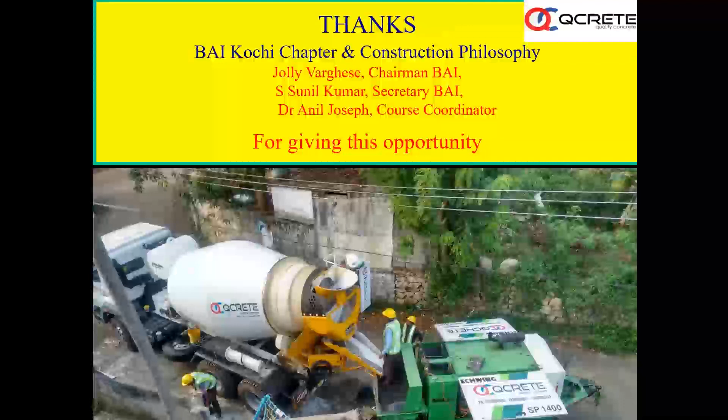Shaji sir: Jolly, with your permission, it was a very wonderful presentation. I'm having 35 years of experience in civil engineering, but still some of your points really taught me something new. Thank you. That's the beauty of civil engineering, every day you learn. Thank you very much, thanks.